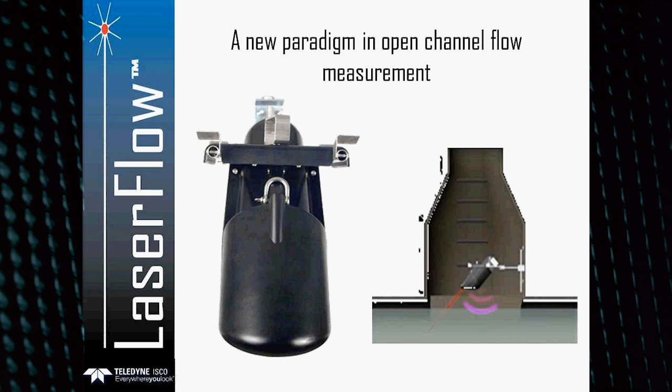Traditional measurement technologies or techniques, I think would be good to review some of those before we get deep into the new technology. In the past, people have used primary devices, commonly known as flumes, or weirs. These are hydraulic structures that both shape and kind of control the flow going through this device. The big benefit of these is that you really only needed a level device to do a level to flow conversion. That's the way they work.

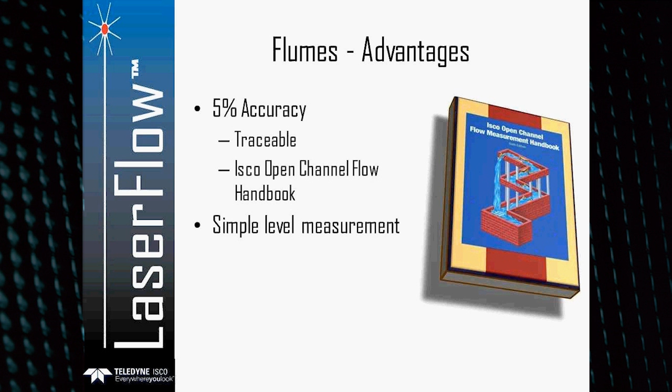Some of the advantages of using a device such as a flume was that they're typically viewed as a 5% accurate device. They're traceable. One of the reasons they are is because they could compare to an Isco Open Channel Flow Handbook, which many of you have had, known as the Bible of flow measurement in the wastewater world. What was nice about that was you just simply took a level measurement, pulled your Isco handbook out, looked at your primary device table, and made sure that the meter was reading the correct value.

The problem with that is all it really did was tell you that the meter was doing the math correctly. It didn't really guarantee that the flume was working properly. But this has been an accepted measurement practice for years. Flumes have been around for a long time, and they are considered one of the standards.

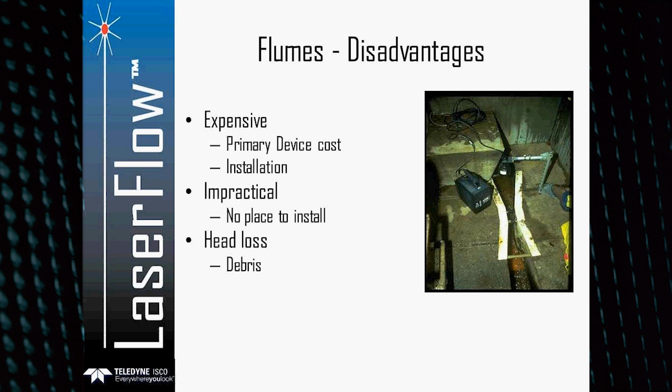Some of the disadvantages of flumes, though, they can be expensive. You have the cost of the primary device itself. You have the installation cost. Sometimes they were impractical to install. No place to install. In my years at Isco, I've had multiple calls where people said I need to be 5%, but I cannot install the primary device. Well, then your hands were kind of tied. So a lot of times they were not very practical. You had head loss issues, debris. You're backing up the water a little bit, so you can have issues regarding those site conditions.

This is another example of a potential problem. Flows can exceed the initial design specifications or requirements. An area of town may have only needed X amount of flow. Now they've grown past that, and you'll have submerged flow conditions through a flume. And on the opposite end of that spectrum, you've had people that would design for handling future flows, and the flume is actually not operating in its accurate flow range, so it's reading too low.

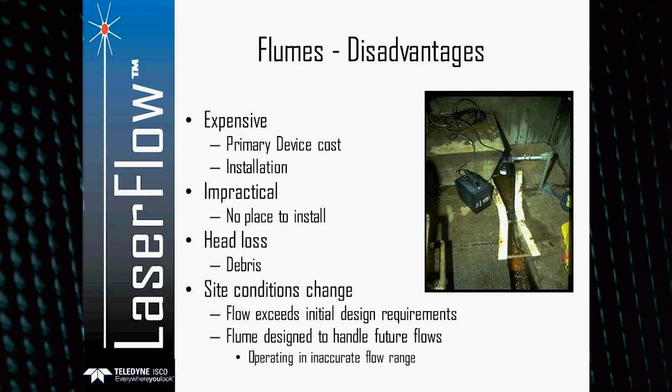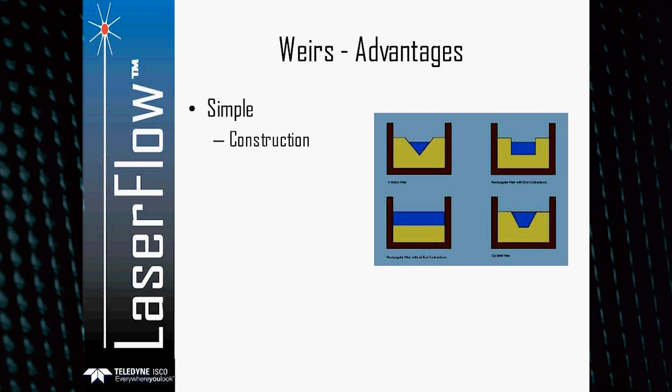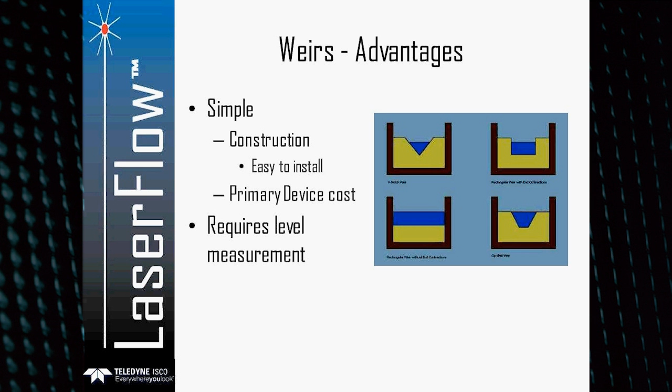Weirs are very simple devices. You have a number of different types, but basically it's a dam that's installed in the flow. Measuring the level over it, we can calculate the flow rate. Construction can be very simple a lot of times, very easy to install. Primary device cost is typically a little bit lower. You're looking at a lot of times stainless. Sometimes people will use some other steel or even plywood we've seen. Requires only a level measurement to get an accurate reading.

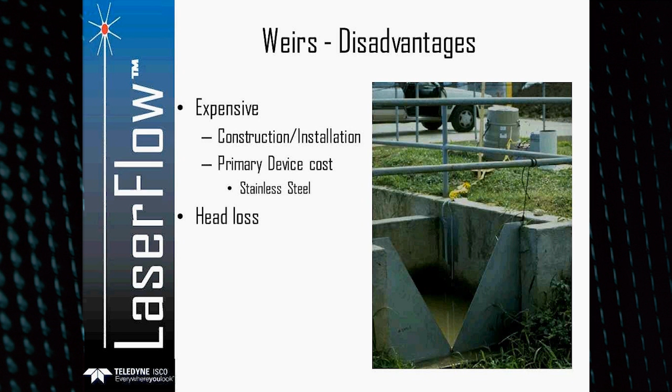Some of the disadvantages of a weir, though, they can be expensive depending on the size of the weir and what it's made of. You have the construction and the installation costs as well. The primary device could be made out of stainless steel, which could be expensive. And you have head loss. You're putting a dam in the water, you're damming the flow up. That can catch debris, silt, and things like that. And if there are submerged flow conditions, this device will not work very well either. You also need proper hydraulics. I need to have the right amount of flow in order to flow freely over that weir.

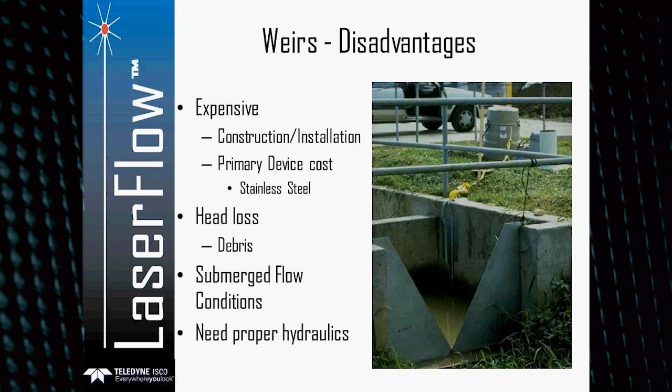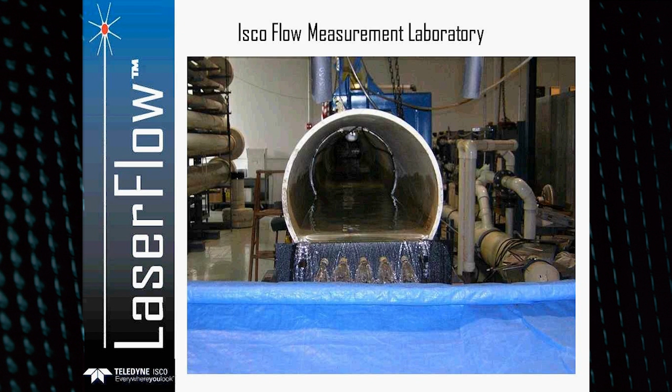Bottom line is we want to provide the right product for the application, which is really the reason that Teledyne Isco provides so many different types of level or flow measurement technologies. I'll go through some of these briefly, but we do, again, want to provide the right product for the application.

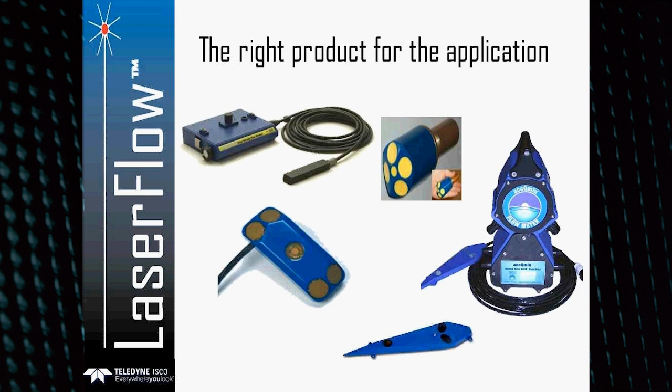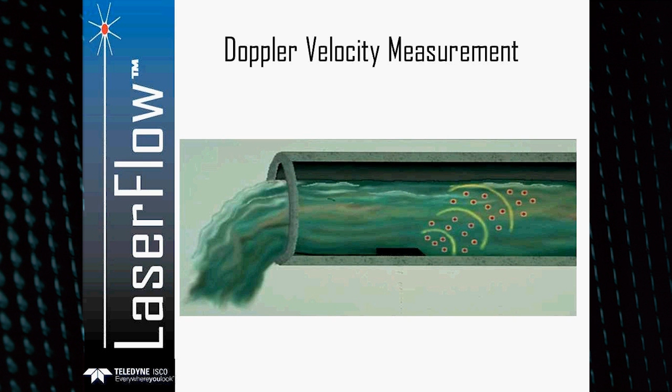Many of you listening are current 2150 users. 2150 is a device that uses continuous wave Doppler to measure the velocity. We have a sensor that's mounted in the bottom of the pipe, transmits a 500 kilohertz frequency, measures the Doppler shift off the particles, and calculates an average velocity.

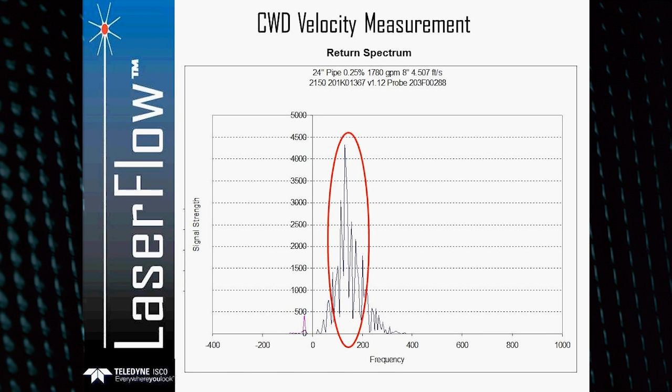This is basically what we're looking at if you were able to look at the spectrum of information. We look at what's coming back. We focus in on the center point, or really where we're getting the meat of the data, and we calculate an average velocity based on that.

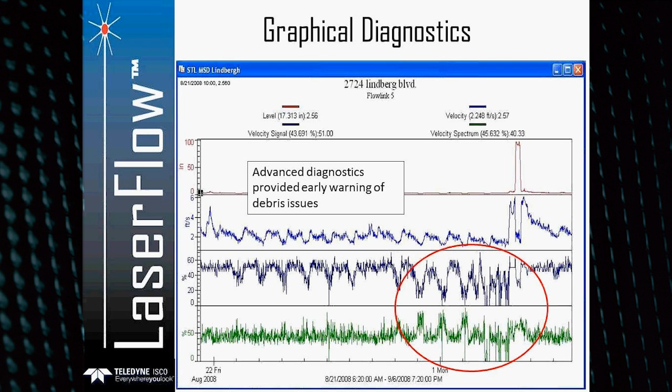Large pipes. One of the areas that we saw a need for a product was in large pipe applications. Some of you may be familiar with the ADFM, which is acoustic Doppler flow meter. The acoustic Doppler flow meter does what's called velocity profiling. Four crystals on the top of that sensor will actually read the entire velocity distribution or profile in fairly large pipes. This is another area that we have used a lot to verify our existing equipment accuracy, and something that you'll be seeing in my presentation comparing to.

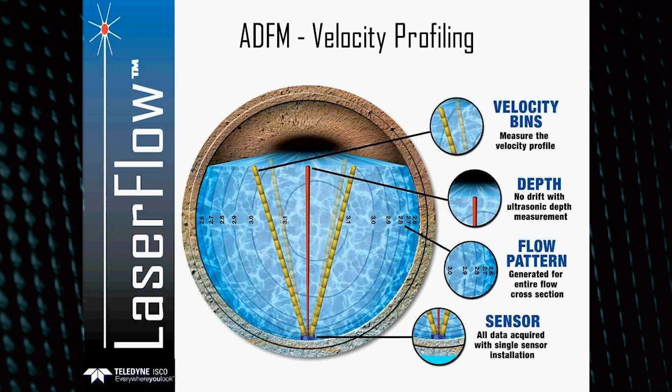Okay, so contact sensors were typically, historically, the only method for measuring flow without a primary device. They required a Manning formula in the old days, and it used only a level measurement to get that flow rate. Bubbler was one of the more common ones. Another one, I realize this is a non-contact device, but I included it anyway, is an ultrasonic and a pressure sensor. Then came along the area velocity measurement techniques. They provided more accurate data, and they also were able to handle surcharged flow conditions.

After that followed the Doppler area velocity sensors, which really improved the reliability of the existing AV sensors. But the only problem with that was you still were a little bit uncertain about your data quality. Small pipes were also a challenge. You had sensors that could be obstructing the flow. We've seen that before where you have a hydraulic jump. But they also can collect debris and could be, again, hydraulic issues. Here's an example of a sensor, and I don't care whose it is. It's probably not giving very good data because of the debris on that sensor.

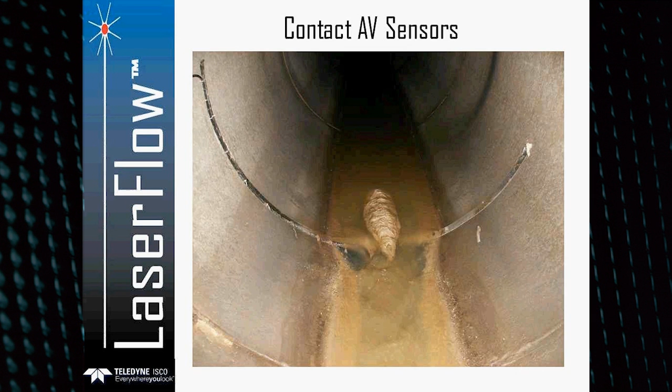There was a market need out there for a device that was a non-contact measurement system, more accurate than a basic ultrasonic, which used a Manning formula that could be plus or minus 20% or much worse, and could not handle surcharge or submerged conditions. So the first systems available out there were non-contact area velocity flow systems that used a non-contact surface velocity measurement and a non-contact ultrasonic depth measurement. The advantages were more accurate than a level-only device. It was above water installation, which allowed for minimizing the maintenance requirements.

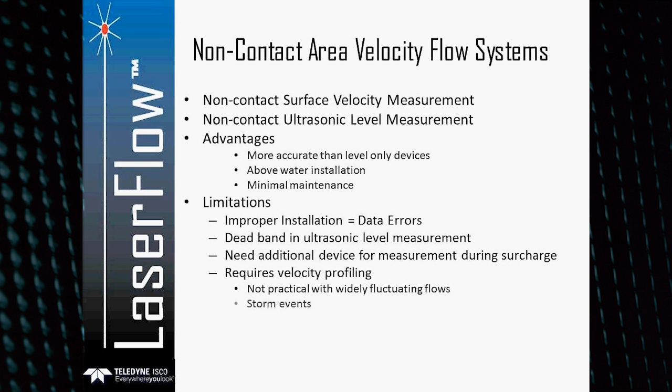Some of the limitations, though, were potential errors involving installation if it wasn't installed correctly. Anytime you use an ultrasonic, you'd have a potential for a deadband error, and you need an additional device for measurement during a surcharge condition. This device requires, to do it properly, a velocity profile calculation, which requires manually profiling the site, which is not practical typically in widely fluctuating flows or during storm events. Bottom line is they only read the surface of the water.

Teledyne Isco's solution is the LaserFlow. The LaserFlow is a non-contact area velocity flow measurement system that uses an ultrasonic to measure the water level and uses laser to measure the velocity. So how does this work? Theory of operation: we have a sensor that's mounted above the water. It transmits using an ultrasonic, measuring the depth. Based on that water depth, it focuses the laser, you guessed it, below the surface.

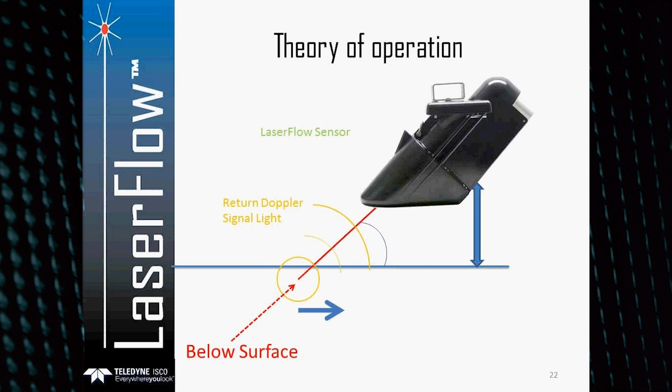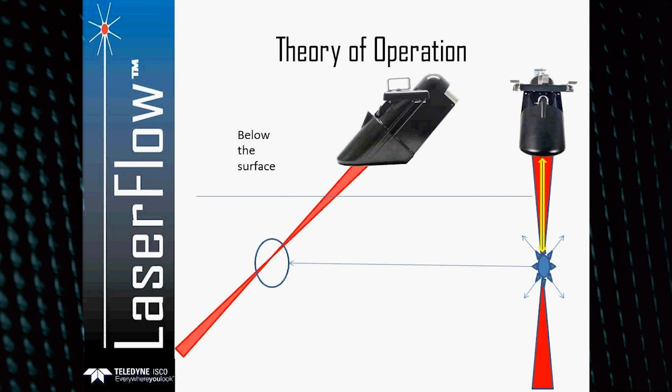Another way of looking at it is we have our ultrasonic, we measure our depth. Based on that depth, we know where we need to look to get an accurate velocity, and we focus the laser below the surface. We now get an intense reflected energy back to the laser. We also have signals that get scattered in different directions. What we are interested in is really what's getting reflected back to the laser. This area is considered to be the converging section or point of convergence. We take 5,000 spectral velocity readings with every reading that we take.

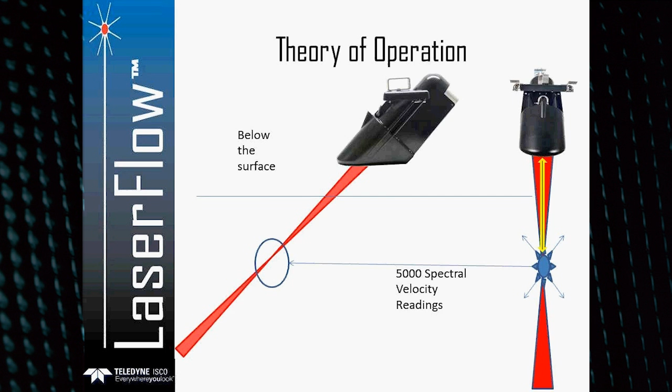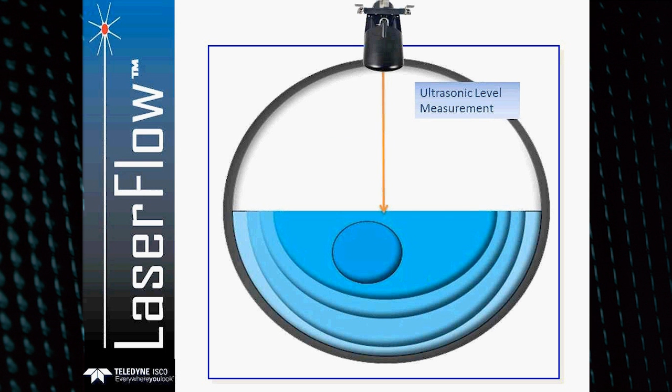How do we do it? How do we set this up? There's multiple ways of doing it. This is the most common or easy way to set up, I guess. The most common way would be doing a simple ultrasonic depth measurement. We focus the laser below the surface, and this is known as a single point velocity method, very commonly used. We also have the ability to do multi-depth velocity, which we take a depth measurement. You turn on the laser, and we focus the laser at 3 points on a vertical plane in the center. That's referred to as a multi-depth velocity method.

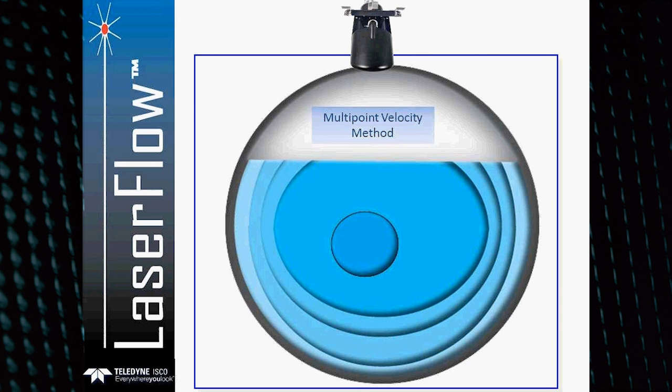We can also do a multi-point velocity method, and the way this works is we take a depth reading using the ultrasonic. We now turn on the laser, and we are able to read 5 points across a horizontal plane below the surface of the water. What's key about this one is if you have a non-uniform channel or something that's maybe not perfect hydraulics, the laser will tell you what it sees at different points in that horizontal plane. This is referred to as the multi-point velocity method.

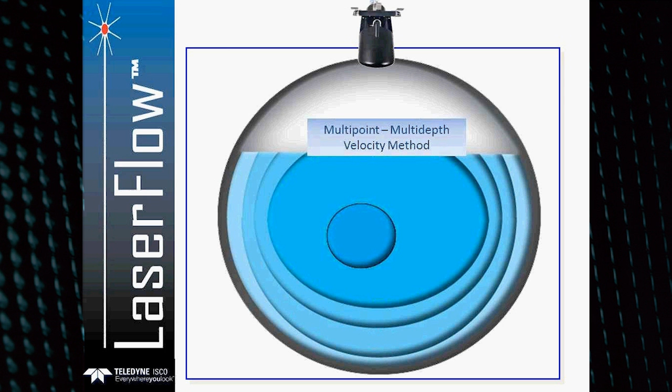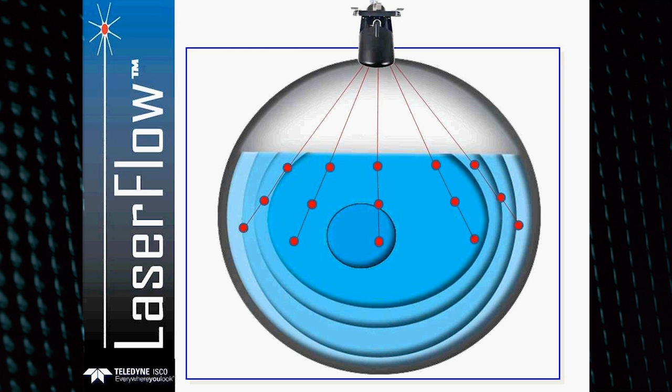Then we took it one step further and we said that's wonderful, but what if we were able to do a level measurement, and let's turn on the laser, let's do a horizontal sweep, but let's go below the surface even further, and we can actually read 3 points below the surface at 5 points across the horizontal plane, giving us 15 points of velocity. This is referred to as a multi-point, multi-depth velocity method.

So when would we want to use a single point measurement? If I have uniform and consistent flows, I would probably be fine using a single point reading. If battery life is a concern, these can be used, and I will explain later, both in AC and DC powered applications. When we take a reading, obviously it's going to consume energy. The more of those points you take, the more battery you would consume in any portable application. Rapid data rate. When we take a reading, that takes about 15 seconds to take that velocity point. Our minimum reading interval would be about 1 minute. So again, if I want to take 15 readings, I'm not going to be able to get those in a 1 minute data storage rate.

When would we use multi-point velocity? Well, multi-point, if we have non-uniform flows, so my flow is fluctuating all over the place, and I want to see what's going on there, I can turn the laser on and see each individual point while I'm at the site and determine which laser point I want to look at, or I can leave them all on. If I have AC power, now we really don't have a concern about battery, and maybe it's a billing application, you want to get the most data you can, the highest accuracy possible. You may want to turn all of those points on. Longer reading intervals. Maybe I'm okay with 15-minute readings. I don't need 1 minute readings. Okay, let's turn all those velocity points on.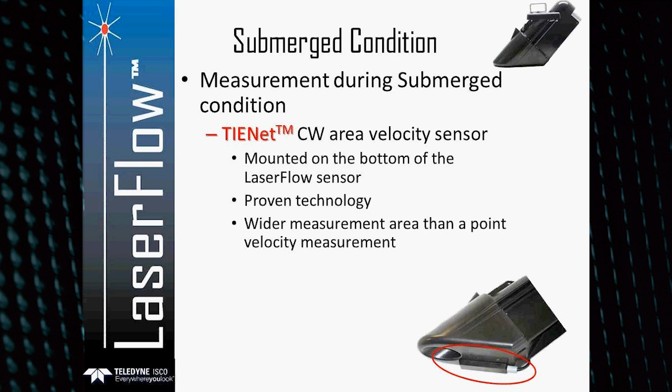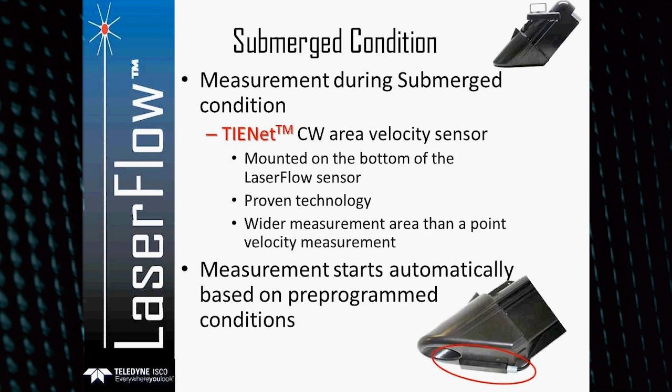It will give you a wider measurement point than some of the single velocity methods that are available. We're now looking not only down into the flow, but a wider path of the flow itself. The measurement of this, which is nice, is we can actually leave that sensor off, not consuming any power, but it can check its level periodically, see if there's any water hitting that sensor at all, based on a pre-programmed condition. Once the water actually hits that sensor, then we turn the velocity sensor on and we start taking velocity readings.

So, to give you a little better understanding of how it actually works, our sensor's humming along there, we have an ultrasonic measurement taking place. The sensor's mounted at the bottom, and we're reading laser velocity.

One thing to point out is that we have a single cable from this device. This laser is another smart device, again, a Teledyne Isco Environmental Network smart device, that allows for a single cable to be plugged into the laser with your sensor, but there's also only one sensor cable that goes all the way to the top of the manhole. You don't have a bunch of cables in there to worry about.

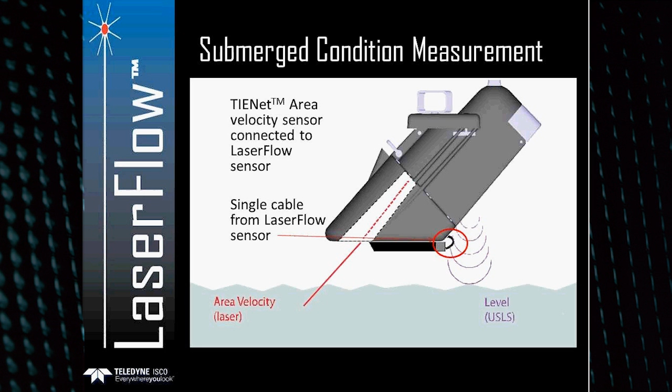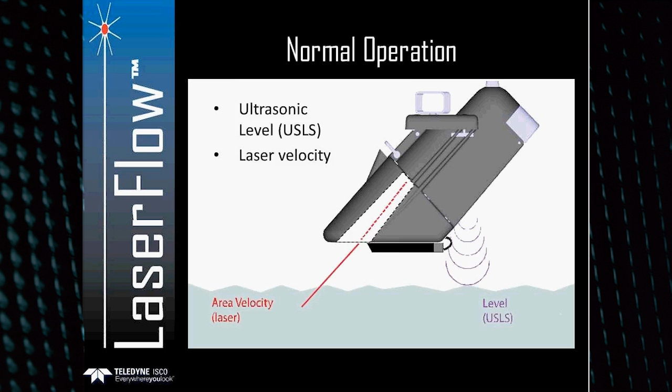So normal operation, it's using its ultrasonic level measurement, taking its reading. It fires the laser, looks below the surface to get the appropriate velocity reading. Now our water comes up. We are starting to become submerged. We're still getting an ultrasonic depth reading.

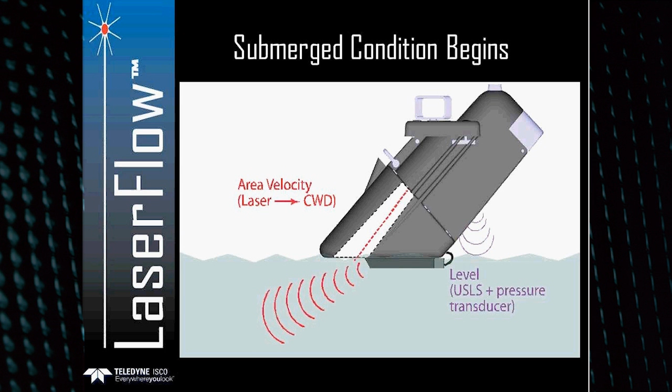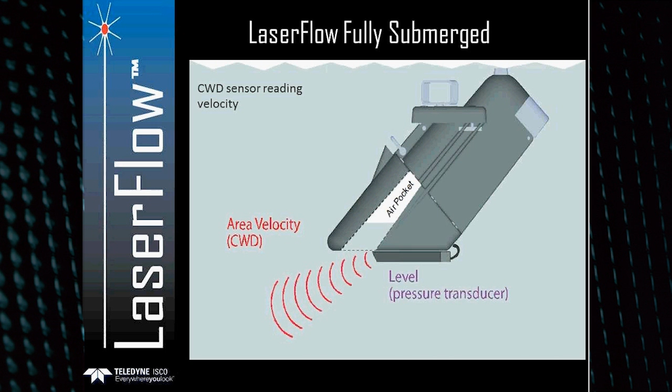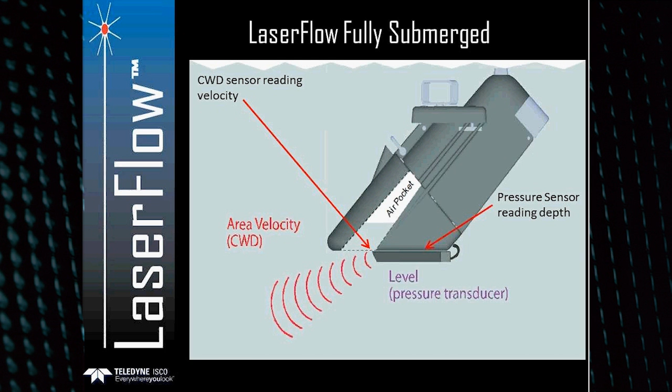The laser is still reading, but now we turn on our continuous wave velocity sensor, and we are completely submerged at this point. We now have the continuous wave sensor reading velocity, and we have the pressure sensor on the continuous wave sensor reading the level. Note that that sensor can read up to 30-foot submergence at that point as well. So you will get a good, accurate submerged level reading in your manhole in addition to accurate submerged flow conditions.

Okay, we can also take that sensor and we can use it in a redundant measurement fashion. Instead of mounting it on the bottom, we have cables as long as 23 meters that can be routed down into the flow stream or into the pipe if you wanted a second opinion. We can also take that sensor and mount it in another pipe in the same manhole. This will again read the depth using the ultrasonic and the laser reading the velocity. But independent of that, we have our redundant measurement sensor reading its own level and its own velocity in that channel.

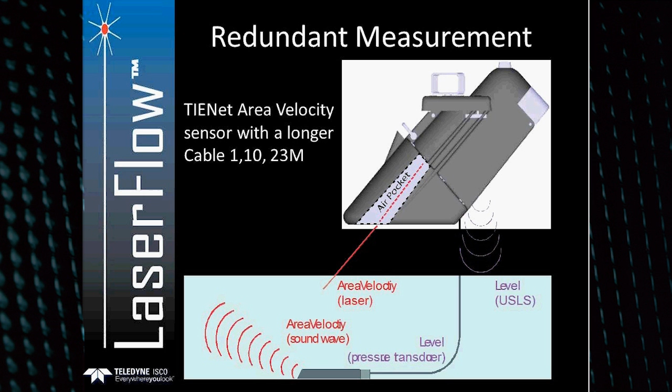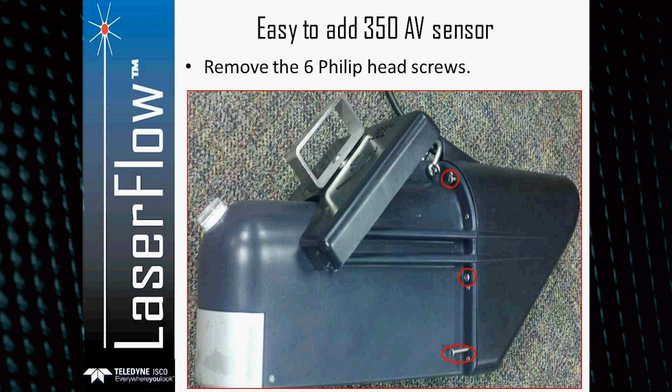This system is very easy to adapt and very flexible. Down the road, let's say initially you didn't anticipate having any kind of submerged condition or maybe didn't require redundancy. You decide a few months later, wow, we really need that. It's easy to install that sensor. You just have to remove 6 Phillips head screws, and the sensor will mount directly to the connector, which is an area velocity snap-on connector similar to what we use on our 2150 sensor. So it's a very easy, adaptable device if future needs dictate that you need to do something like that.

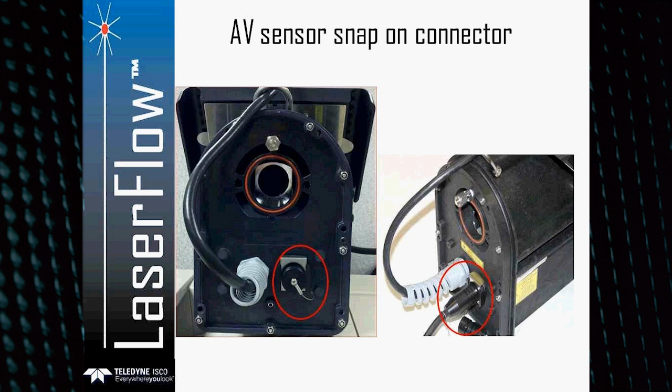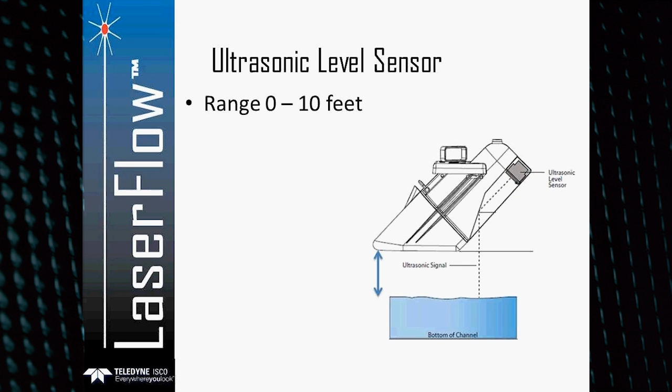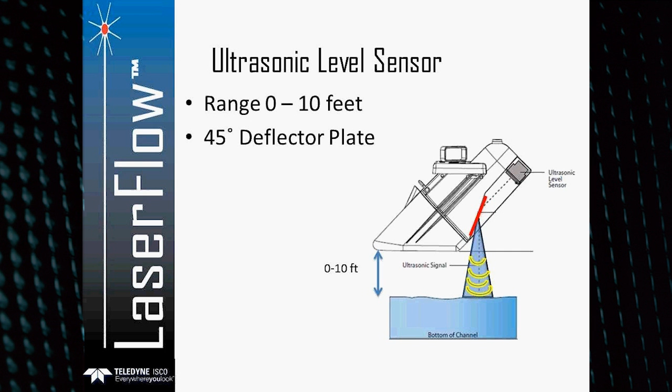Okay, how do we get our level reading? We use an ultrasonic level sensor mounted in the back of the LaserFlow sensor itself. It has a range of 0 to 10 feet. But what we've done is we've actually designed it to deflect off a 45-degree plate that's part of the sensor itself. What's key about that is when we reflect off that 45-degree plate, we now have a 0 deadband. We have taken the deadband that any ultrasonic will have, and we've eliminated it from our level reading.

Once that water level hits the LaserFlow sensor, we are now turning on the continuous wave pressure sensor and no longer need the ultrasonic. In addition to this, it should be noted that the sensor mount and the way we mounted it is to keep moisture from condensating on a horizontally mounted sensor. So we can shed any moisture droplets or possible debris that could want to settle on that sensor. So we've now, again, minimized maintenance requirements.

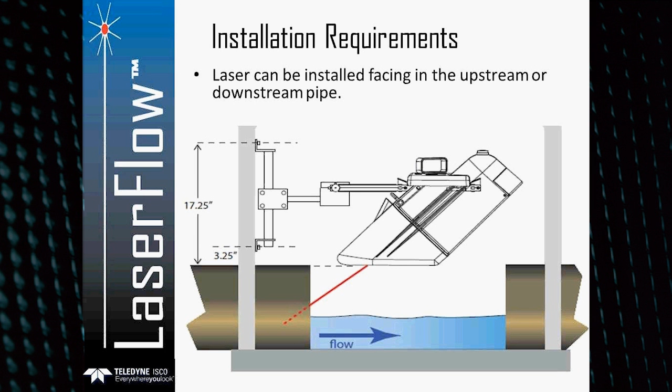So how do we install this? It's a very easy install. There are 2 bolts that mount a mounting bracket to the wall. That's one way of doing it. The laser can be installed both upstream and downstream. I should point out this device is capable of reading bidirectional flow. It is able to read either positive or negative velocities, which is kind of a leap over current technologies. The only thing you need to do is center the bracket over the flow stream to mount it.

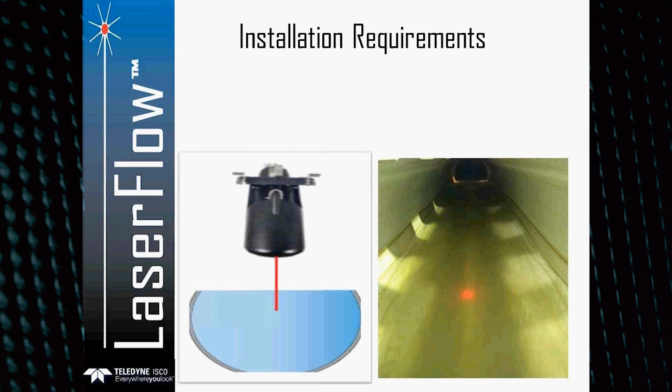And here's a couple of pictures that kind of give you an idea. We have the LaserFlow sensor on the left. It's mounted in the middle of the channel. The right picture you'll see is showing the actual laser dot in the water. When you install that, again, install it middle of the pipe, parallel to the water surface.

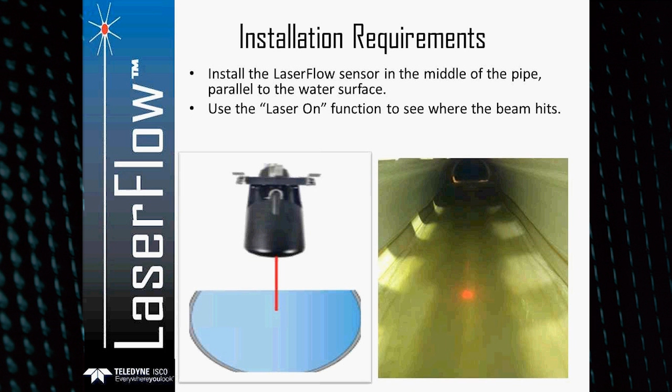But one of the neat features behind this device is we were able to turn the laser on when you do the install. So now when the field crews go and install this, they can mount the device, get it centered, fire the laser. They can see exactly what the laser sees. They don't have to guess what it's seeing. They know exactly where it's pointing.

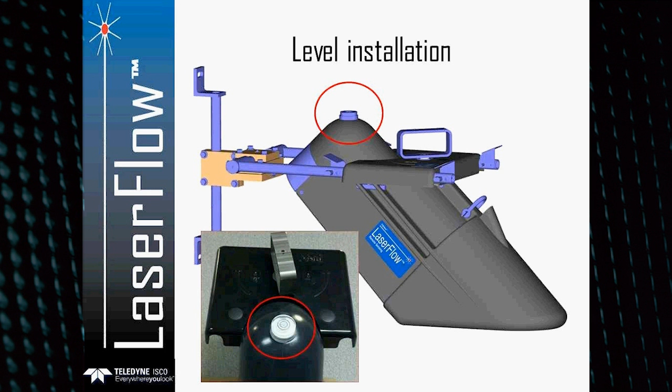So the other part of the laser install that's somewhat critical is we want to make sure the sensor is level. The level is indicated by a little bubble level on the top of the laser sensor. So field crews go out, they make sure they're aiming in the middle. They can adjust the pitch and roll to make sure that the bubble level is showing that you are level. It should also be noted that the laser sensor has an accelerometer built into it, so remotely looking at diagnostics, you can tell if the sensor is mounted correctly without even looking at it.

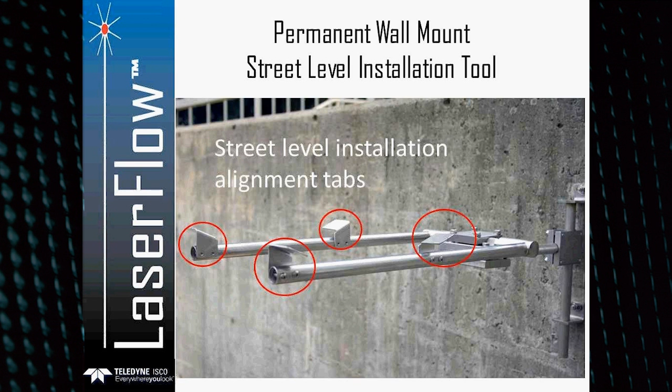Permanent wall mount. This is what the wall mount looks like. It also is used as a street level installation device. Now let me show you how this works. We have street installation tabs. Sensor cradles onto the mount and snaps in place. What these alignment tabs do is allow for us to use a street level tool to install the device or remove it for periodic maintenance. Very easy to do. Just simply nestle that device on there and turn the handle, snap it in place, and it's locked in and ready to go.

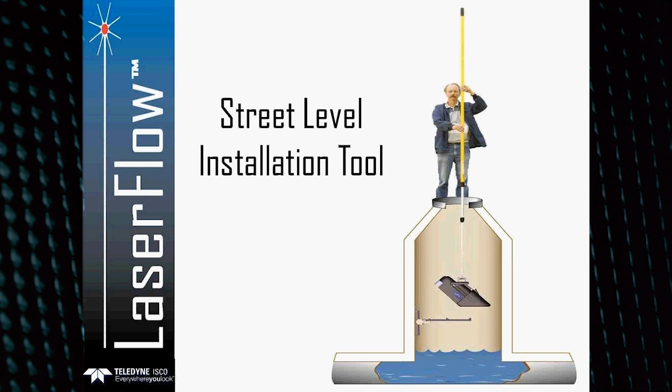It should also be noted that once the unit is calibrated, the water level is calibrated, which is the only requirement. If you remove that sensor and you put it back in the same location, there is no additional level calibration required. It will take off right where it left. This is what the device looks like. Again, the alignment tabs help you feel its way down into the mount if it's a deeper manhole. And you'll see the mount on top, 1/8 of a turn, and it snaps and locks the laser in place.

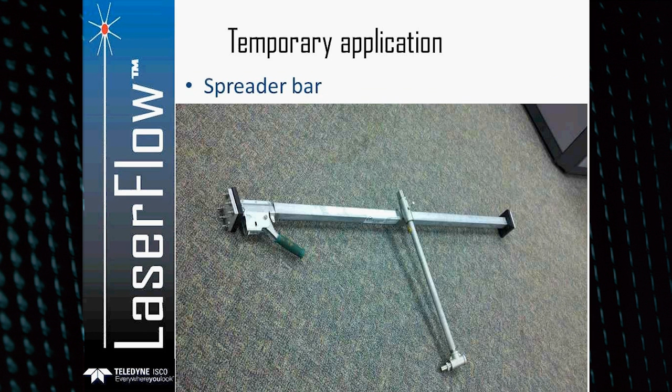This is what the laser looks like when it's mounted. Again, it can be pointed into or away from the flow. It doesn't care which direction it's measuring that flow. Another method of installing the device would be using a temporary spreader bar. This is basically a jack stand device that has spikes on the end that allow you to jack it against the walls of the manhole and gives you a good sturdy mount, but you can install or remove it without having to drill any holes in your manhole.

So the LaserFlow sensor, again, it's a TIENet, Teledyne Isco Environmental Network trademark sensor. Uses laser to penetrate the flow stream. We are not doing a surface velocity, we are penetrating the flow. We are the only ones that are able to give you a multi-point measurement below the surface. This technology is also capable of reading bidirectional, positive or reverse flows, which is a significant improvement. It also uses a smart Teledyne Isco Environmental Network non-contact ultrasonic level measurement system. Because of the mount and the way it was designed, we have no deadband on that ultrasonic sensor. Mounting perpendicular to flow will avoid any condensation that could potentially build up on a horizontally mounted sensor.

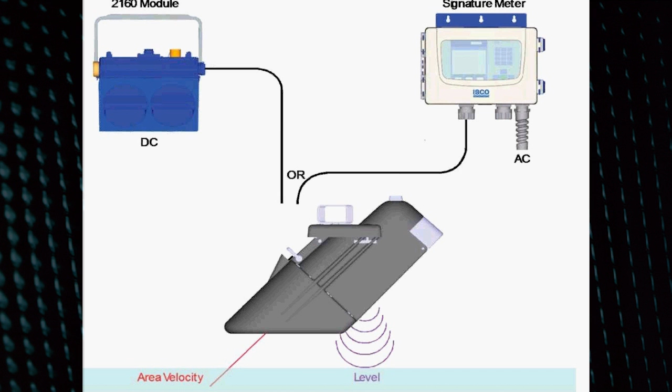So what are some of the capabilities as far as electronics that we can connect to this device? You'll be happy to know, for the 2100 customers out there, we can hook to a 2160 module, which is a new module, or we can hook to the Signature flow meter. So for portable installation, you can use the 2160, and for those of you that are familiar with the 2100 system, it is a 2100 series family member. Same connection, same communication cables, the whole bit.

It's a modular design. I can connect multiple 2150s if I want. So if I had a site with 2 or 3 other 2150s measuring flow in different pipes that feed into a manhole, and perhaps a larger pipe that exited the manhole, you could mount the laser on that system, pointing it downstream and measuring the combination of those lines that feed into it. So it's very flexible with existing 2150 users.

It uses very power-efficient electronics, which run from anywhere from 12 to 24 volts DC. Because of the 2100 design, we can stack additional battery modules to extend the battery life. Keep in mind, the batteries that we use are not proprietary Isco batteries. They are off-the-shelf alkaline lantern batteries. This is an important feature when you don't have to get in there and do any kind of sensor cleaning.

Because it is part of the 2100 series family, it does the variable rate data storage. For those of you that are not familiar with this feature, this is one where we can actually adjust or modify the data storage reading based on a condition. Very commonly in the U.S., 15-minute readings are what people will select for data storage. But during an event flow or a storm flow, you may want to have the meter switch to a 1-minute high-resolution mode, in which case it will be taking 1-minute readings when that event happens. Once the event goes away, it now shifts back to the 15-minute mode.

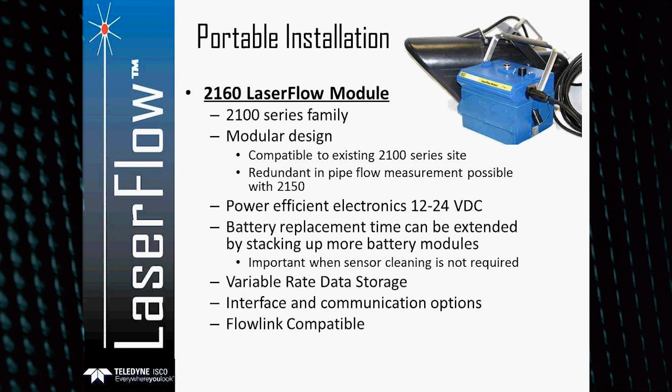This is an extremely popular feature with 2150s, and we feel it will be another very positive feature for the LaserFlow. It uses the same interface and communication options, which means it is FlowLink compatible. There is an upgraded FlowLink version to connect to the laser, but that's really all you need. Communication cables work the same. The cellular communications work identically, as well as the FlowLink Pro push capability. So it fits very nicely into the existing 2100 series family.

Permanent applications. We have the Signature flow meter, which is a permanent meter that is AC powered. It has the capability, because it is a smart device, to handle multiple simultaneous inputs and outputs. It can allow for easy field upgradable options, such as analog outputs, multiple ultrasonic sensors, area velocity, continuous wave sensors, as well as the laser. So it's a very user-friendly, upgradable product.

Data integrity. The Signature has the ability, when it stores data, to allow you to use a program to verify that the data has not been altered in any way. And this is extremely important for billing applications or even custody transfer applications where data integrity is key. We have also added a USB interface option so that now you don't have to have a laptop to download. You can simply plug in the USB interface and download the data.

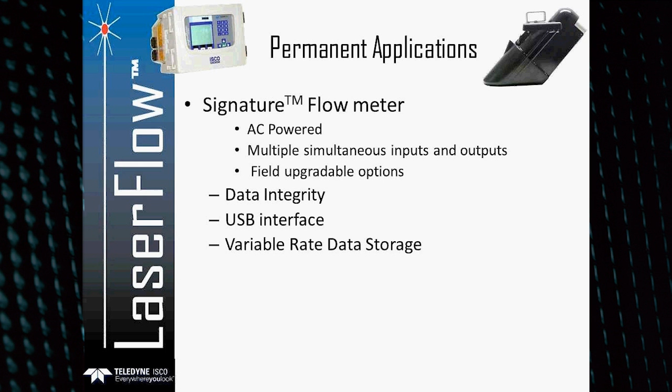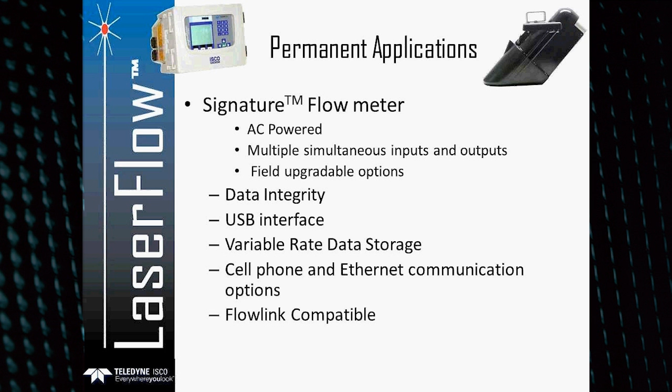As with the 2100 series, it has the variable rate data storage capability, which will be key, again, I think, in a lot of billing applications where maybe they run different shifts and they have more flow during the day than they have at night, and they want to capture more data during the operation of that facility. It has the ability of using an integral cell phone option or Ethernet communication option. And yes, it is FlowLink compatible. This is what the Signature looks like. It has a built-in display as well as keypad programmability.

So to give you a little better idea of the flexibility of this device, we have internet accessible data, different alarm configurations, USB options, again FlowLink, Modbus, SCADA, Ethernet, or analog. On the flip side, we can interface to a sampler for pre-treatment. We can connect to anything in the TIENet family, such as multiple ultrasonic level sensors, multiple bubblers, SDI-12 inputs, as well as different devices that may have a Modbus output. We can take that directly in as well. And yes, we can connect to the LaserFlow sensor.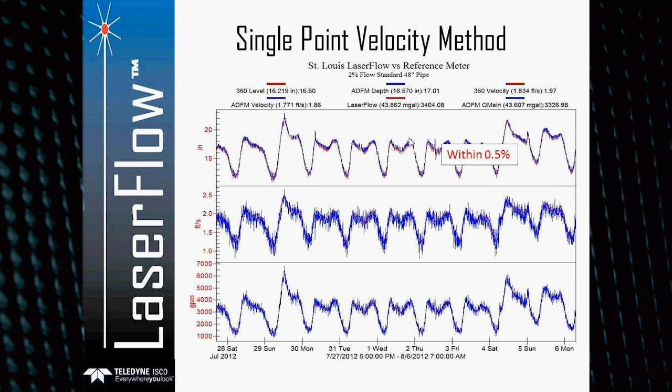Here's an application where we had a test meter in the city of Omaha. You have your normal diurnal pattern. Again, we're looking at the level. This is laser only. We have level data here, looks very normal. What's interesting with this data is we have a couple little bumps that were different than a normal diurnal pattern we were looking at with normal open channel flow. And we would see these little blips periodically and couldn't really explain them.

We talked to the city of Omaha engineers. They said, oh, wow, that makes perfect sense. This is upstream from a siphon, and you can literally see the water surging as the site conditions downstream change during the time of the day. So very interesting that the laser was able to pick up such fine detail at that location.

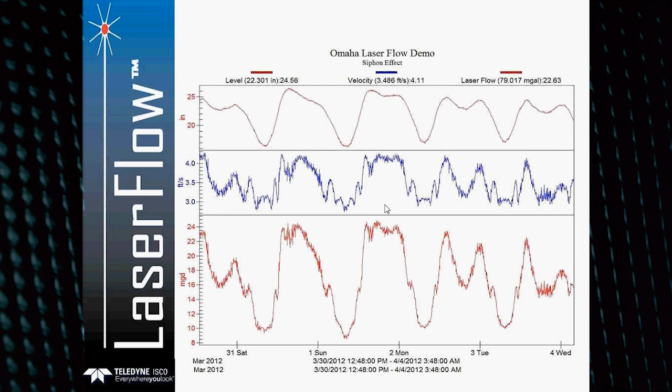Here again is the ADFM. Again, we had the ability of comparing to a good standard in a 72-inch line. This is an ADFM compared to the laser. The top pane, once again, is the laser in red, ADFM in blue. The velocity, again, in the center here. And they had a nice storm event. What you'll see is a pretty significant submerged flow condition or surcharge condition.

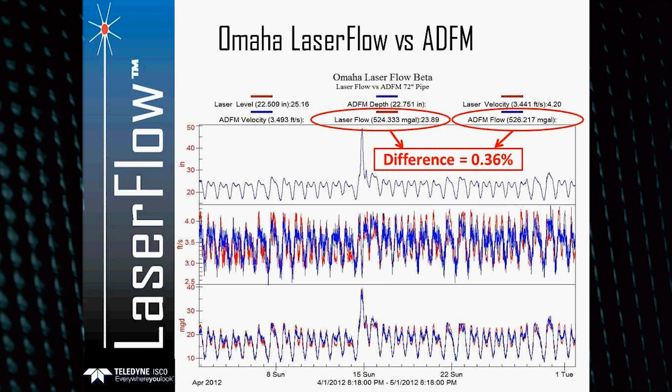Level went anywhere from about 20 to 50 plus inches. The laser tracked all the way through that, very, very close. Keep in mind, this was a single point velocity method. We didn't even use a multiple point on this, and it did a very good job. When you look at the totalized flow, 524 versus 526 million gallons, there was a difference of less than 0.5%, 0.36% in this case.

Okay, when you're doing non-contact, it's important to have something that you don't have to obviously do maintenance on, but you don't want to have to go and recalibrate, and you want to make sure you have good, stable, reliable, daily repeatable data. This is a site in St. Louis where they were testing. This is a pumped flow application, and you can see it in the level data as well as the velocity, but you'll see the up and down trend with the pumps kicking on and off.

The bottom pane is actually the two different velocity days shifted over each other. So I took one day normal and shifted it over the other day. What you will see here is an extremely repeatable pattern. The velocity for these two days, the average was 1.966 and 1.962. Incredibly stable and reliable velocity information.

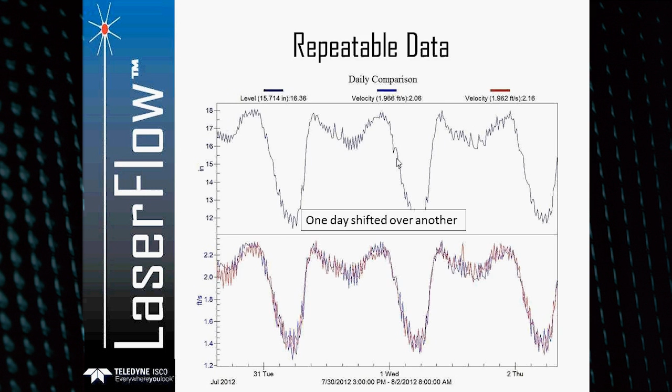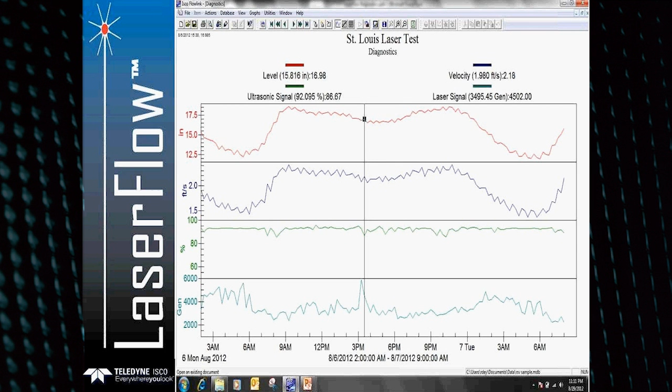Here's another site, again, where we looked at measuring not only the depth and the velocity, which are in panes 1 and 2, but we, again, are capable of reading and storing a lot more diagnostics information. When you look at this, our level and velocity look very normal. The two panes on the bottom, which are pane 3 and 4, this one shows the ultrasonic signal strength. So now we can verify and ensure that the sensor is working properly from a level standpoint. This is all stored in the data storage.

You can alarm off of this condition to know if somebody were to have to go do any kind of maintenance on this location. What's even more key is we store the return laser signal power, or the energy. This is huge because anytime you're doing non-contact, you have to have confidence that the reading you're getting is valid. Your meter will be able to tell you if what it saw was a valid reading and what it saw it liked. So now you can not only do in-pipe readings where you have verifiable data using diagnostics, but now you can do non-contact, getting the same powerful information to be able to confirm your data are correct.

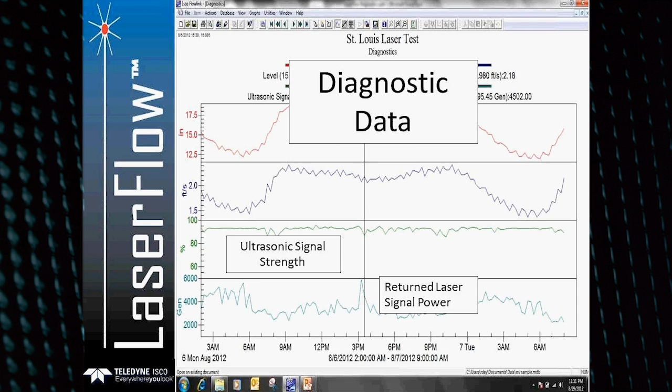Okay, so where would we use this device? Collection system monitoring would certainly be one of the applications. We have permanent AC powered Signature, so some of the major trunk lines that might need to be permanently monitored could be easily adapted using a Signature meter. These can be used for billing applications where maybe custody transfer is a big one. We can also do portable DC powered, as I discussed, using a 2160.

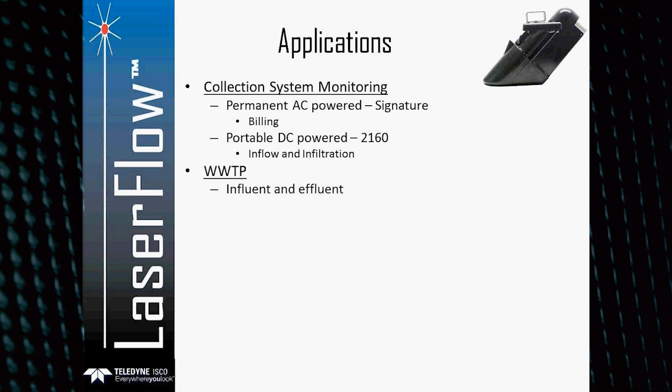This is key for people doing inflow and infiltration studies. A lot of times people are looking at multiple trunk lines or smaller lines that feed into a larger trunk line. They can now deploy a LaserFlow with a 2160 to capture that large trunk line flow for I&I studies. Wastewater treatment plants are going to be a big potential. Both the influent and the effluent can be monitored using the non-contact device. Influent pipes and channels within a treatment plant would also be another good application for the device.

Hydraulic modeling. Again, when you put data into a hydraulic model, your model is only as good as the data that you put in there. You need to have accurate data going into the model. The LaserFlow will give you that.

Industrial monitoring. Harsh chemicals and environments. You don't want to get in there, especially industrial customers. They do not want to have to mess with their flow any more than they have to. They can install one of these, non-contact, not affected by harsh chemicals or the environment, and it's pretty much plug and play. Turn it on, get it going, and leave it alone.

Stormwater applications, another big one, primarily because of large debris. Stormwater can handle who knows what goes through those lines. Combined sewers, the same thing. You could have cars go down those lines, all kinds of debris, tree trunks, things like that. The LaserFlow will give you the ability to stay out of that location.

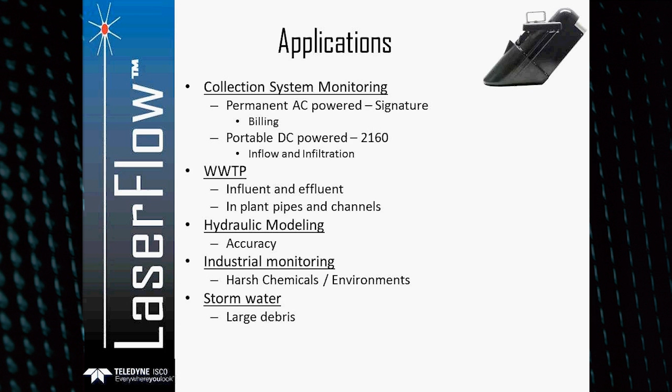Here's an example of an application where they had real harsh chemicals, a tannery in Turkey, where they needed to measure something. In this case, they could use a continuous wave, or they could use the laser. Again, harsh chemical environment.

A storm sewer application. We see more and more requests for this type. We don't want something in the water because of, again, debris, things like that. And storm sewers could have pipes that are very large pipes, especially combined sewers. You may have very low level flows that you need to measure, and maybe it's a 10-foot pipe that's got a couple inches of flow in there.

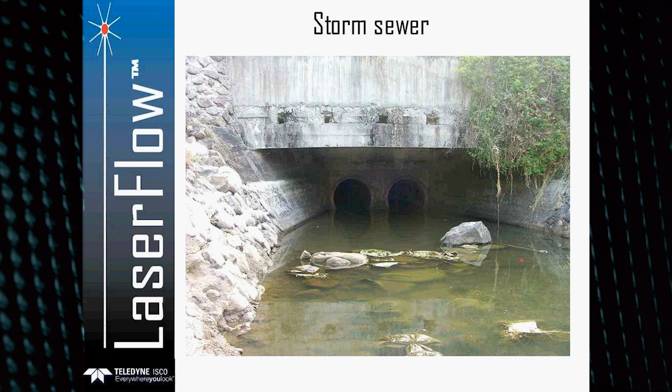If you're within 10 feet of the flow, the laser will read that. So you can mount it higher, and once that water level comes up, it will account for and read the entire range of that line.

Submerged flumes. Seeing more and more applications for measuring submerged flume conditions. In this case, if you had to measure this, you would have a challenge. Typically, you would have to measure upstream and downstream and try to do some sort of an offline calculation using a submerged flume table. That accuracy would be suspect at best. This is also a fairly large channel. The laser would be a good option to mount up in front and be able to read during these conditions without having a sensor in the channel itself.

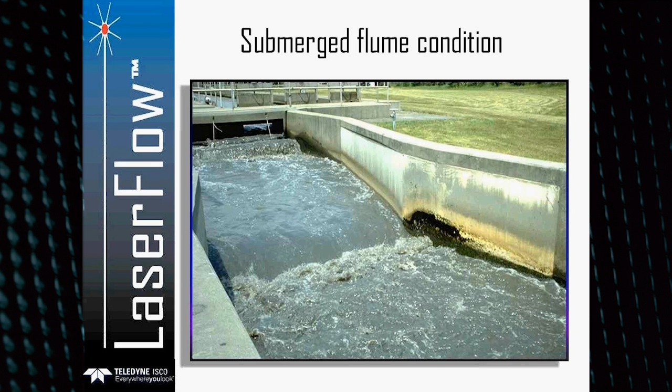Here again is the application in Turkey where they have a flume in there, but they do frequently surcharge this line. In this case, the Signature meter really is a great selection because they have the ability of using the Signature bubbler or ultrasonic to measure the flow in the flume, but they have the ability to use the LaserFlow upstream of that flume, and they can take it all into one device and read both the flow rates from each device, separate the analog outputs to each device as well, and get good, accurate flow data no matter what their site conditions require.

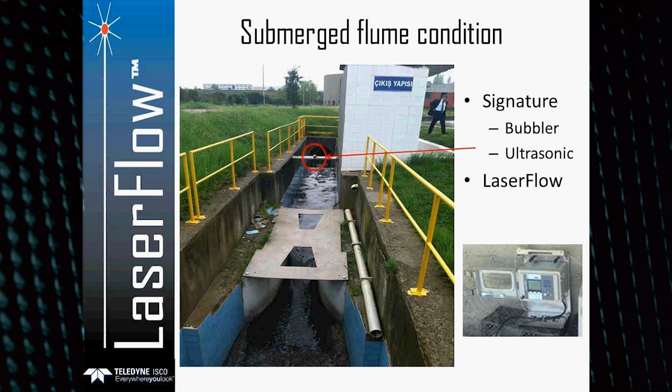So in summary, LaserFlow uses advanced laser velocity measurement. It is the only non-contact flow measurement system that can read below the surface. I will say that again, it reads below the surface. It is the only one that can read multiple points, and again, we are doing multiple points below the surface velocity measurement. A very unique capability of this device.

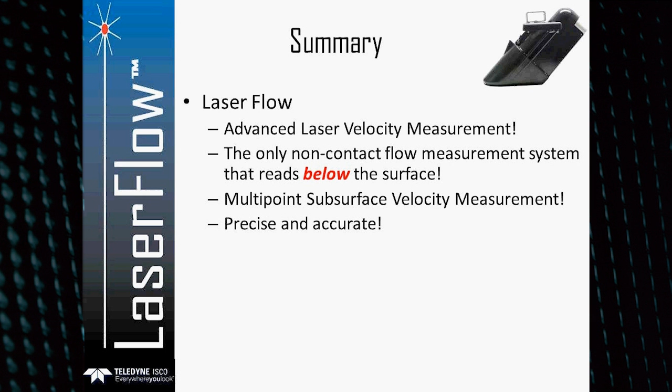It is both a very precise and accurate measurement. We are going from tube televisions to high-definition big screen TVs with this device. It is also very easy to install and maintain. Very easy to set this up. It takes typically anywhere from a half hour to maybe an hour to install it on a permanent. Portable would take less time. Again, the benefit is we can install it very easily. Remotely, you can look at some of the diagnostics capabilities and tell if the sensor is mounted correctly without going back into that hole.

Because we're using a continuous wave sensor on the submerged flow option, we are now able to get a better submerged flow measurement. It will now read not only what's happening in the invert, but it will transmit and read what's flowing through that manhole basically into the pipe using the continuous wave measurement. And we feel that measuring into that pipe is going to be a more accurate measurement of a submerged flow condition.

And again, it's a very flexible platform. The device will work with anybody that has 2100 series, and we know there's a lot of you out there. It will be a welcome addition to your existing family. The 2160 will welcome it with open arms. The Signature, for those of you that are starting your program or maybe have begun to expand using some Signature meters, now we have the ability to use both with 21s and Signature, providing you maximum flexibility on an AC-powered, permanently installed device.